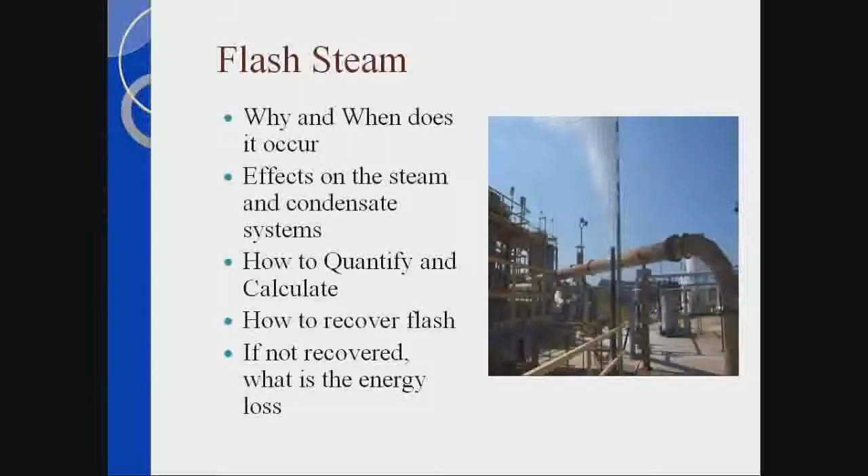Flash occurs - if you look at item 1, that's 100 psi steam coming into the process. 100 psi steam is going to be 338 degrees. It releases the latent energy, condenses down into condensate. Condensate's also going to be 338 degrees Fahrenheit. So down at point 2, the condensate going to the steam trap will be 338 degrees.

As condensate passes through the orifice of the steam trap, it will see a lower pressure. Let's say that is 0 psig - the condensate temperature has to come down to 212 degrees. How does it get its temperature of the liquid down to 212 degrees? It takes a percentage of the liquid and changes its state from liquid to vapor, or flash steam.

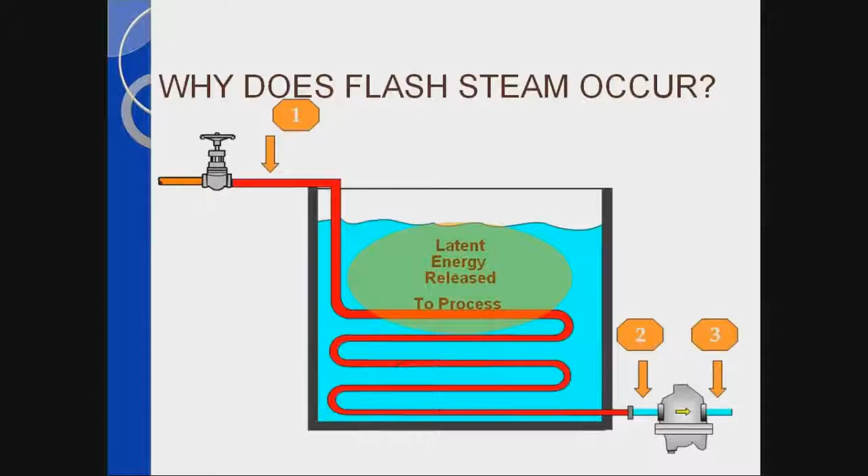For any given saturated steam or condensate pressure, there can only be specific values listed in the steam table - we call it the saturated steam tables. On release at each lower pressure condition, the heat energy that is released is called flash steam - that's the effect.

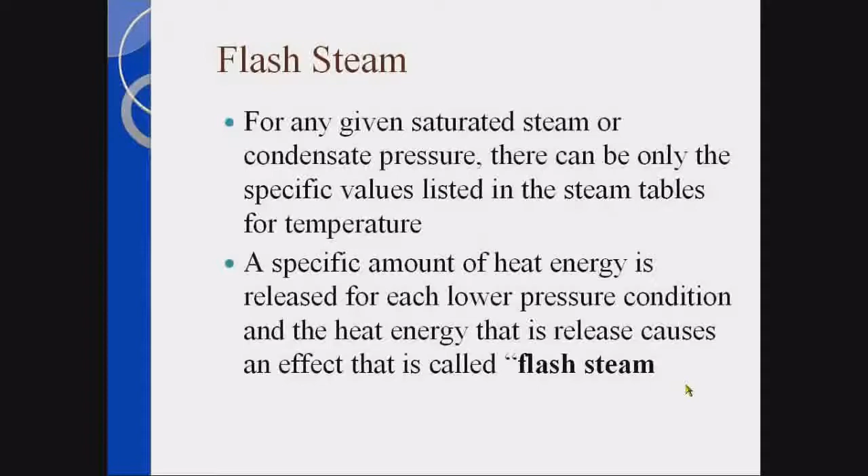Flash steam affects the condensate return line sizing, receiver tank vent sizing, steam system testing, steam trap discharge piping, energy loss. If loss increases, chemical costs increase, and if loss increases, makeup water increases. One of the things flash does is it causes water hammer if condensate return systems are not properly piped.

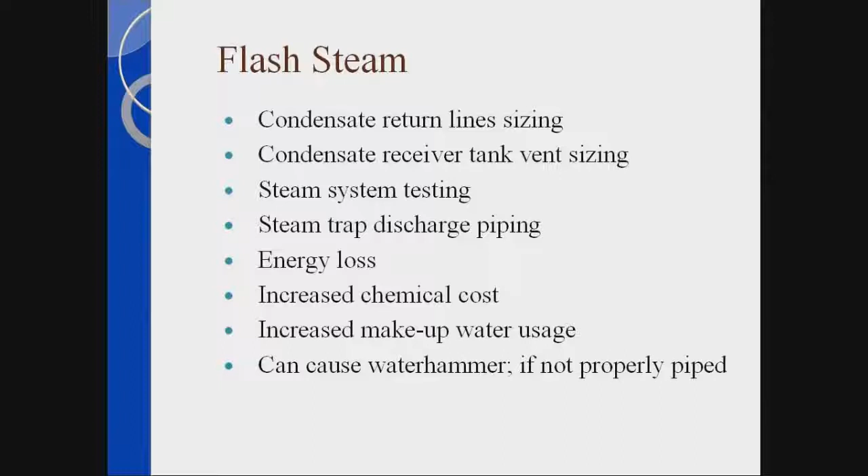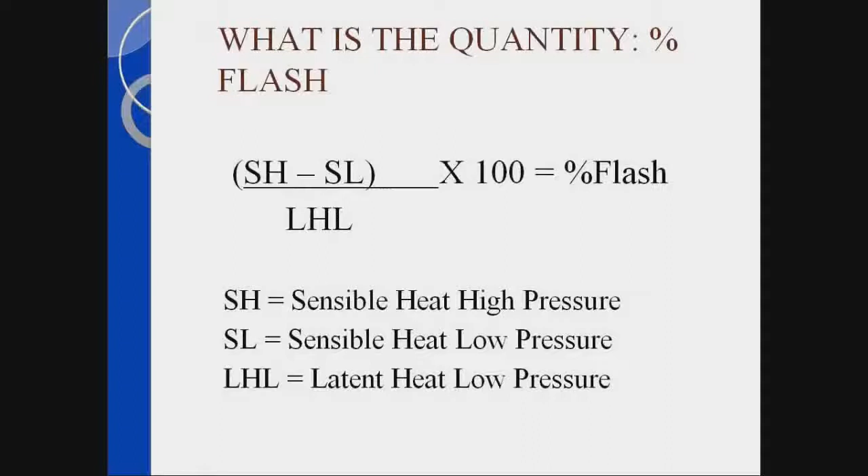How do we come up with the quantity of flash? The simple equation has been around for years: SH minus SL, divided by latent heat low, times 100, equals the percentage of flash. The question is, what is SH? That's the sensible heat at the high pressure. What's SL? Sensible heat at the low pressure. What's LHL? Latent heat low pressure.

Example would be a heat exchanger. We have a control valve supplying 100 psi to this heat exchanger. The process is absorbing the latent energy, condenses down into condensate, and the condensate in this piping to the steam trap is at 100 psi, or 338 degrees Fahrenheit. It discharges into the condensate return line, which is at 0 psi, so the temperature drops to 212 degrees.

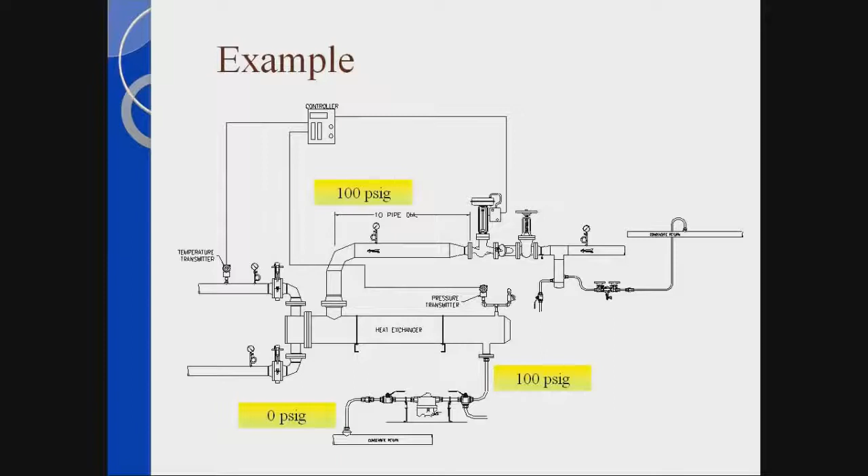If you go to the saturated steam tables and look up the sensible energy of the liquid high, you'll see it's 308 BTU per pound. The sensible low is 180.33 BTU per pound. The latent heat low, LHL, is 970 BTU per pound.

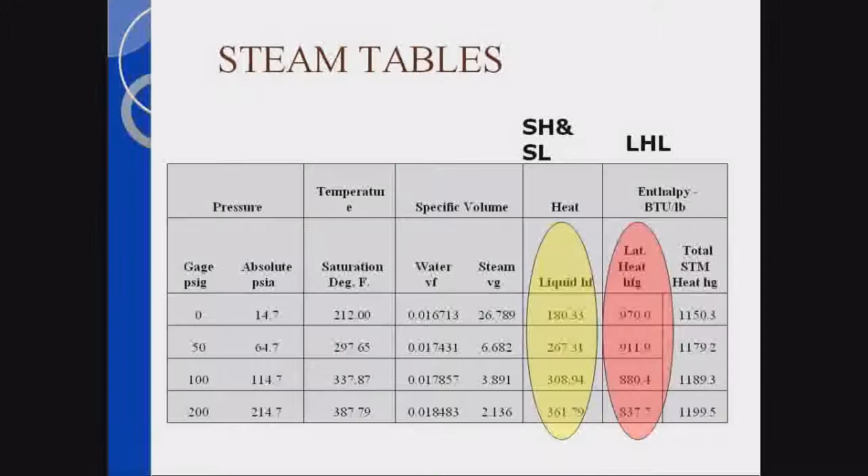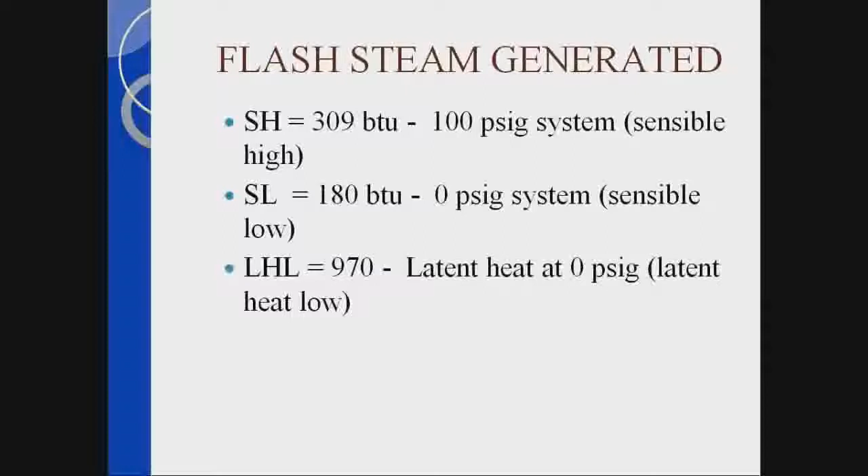If I put this into the equation, SH equals 309, which is the high side of the steam trap. The discharge side of the steam trap is 180 BTU per pound. The latent heat is 970, so I divide that into the equation: 309 minus 180, times 100, divided by 970, equals 13.3%.

What does that mean? If there's 1,000 pounds of condensate flowing through this heat exchanger, 13.3% of the liquid will change state, or 133 pounds of condensate, will form flash steam.

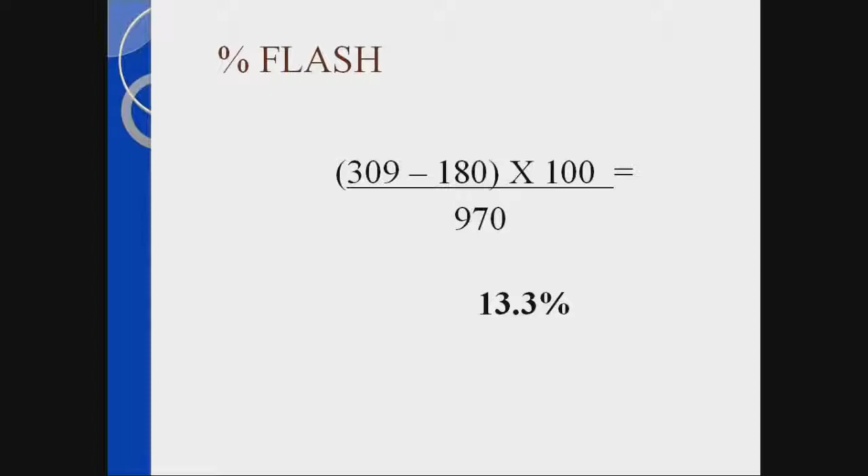The other thing to remember is, if condensate is passing into an atmospheric system, the flash steam is going to expand somewhere around 1,600 times. Therefore, we have to make sure we compensate the return system for the amount of flash that's going to occur.

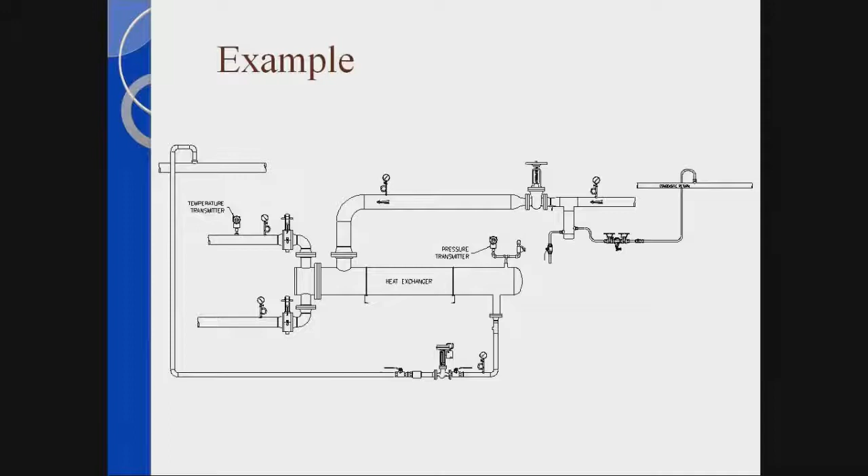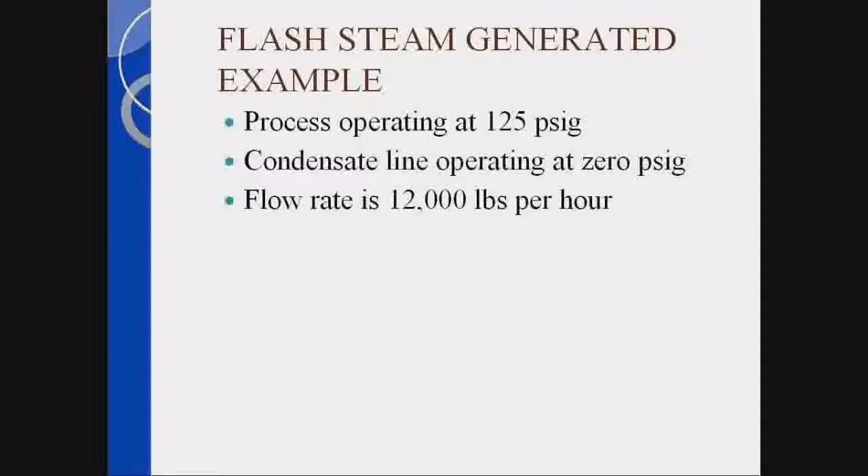Example: here is a process coming in. Steam comes into this process, goes through a control valve, and is raised up to the condensate return line. This example is operating at 125 psi. The condensate line is operating at 0 psi-G. The flow rate is 12,000 pounds per hour. Going through the calculations again: process consumption is 12,000 pounds, process steam pressure is 125 psi-G, the steam load is modulating, and the condensate return line pressure is 0.

Going to the saturated steam table, I find SH equals 324 BTU per pound, SL equals 180 BTU per pound, LHL equals 970 BTU per pound. The percentage of flash is 0.148. The amount of flash that's going to occur...

...is 1,776 pounds per hour. Now, if I do not recover that, and the cost of steam is $14.80 per 1,000 pounds, if this loss goes on 24/7 at 360 days a year, that loss is $227,000 if the flash steam is not recovered.

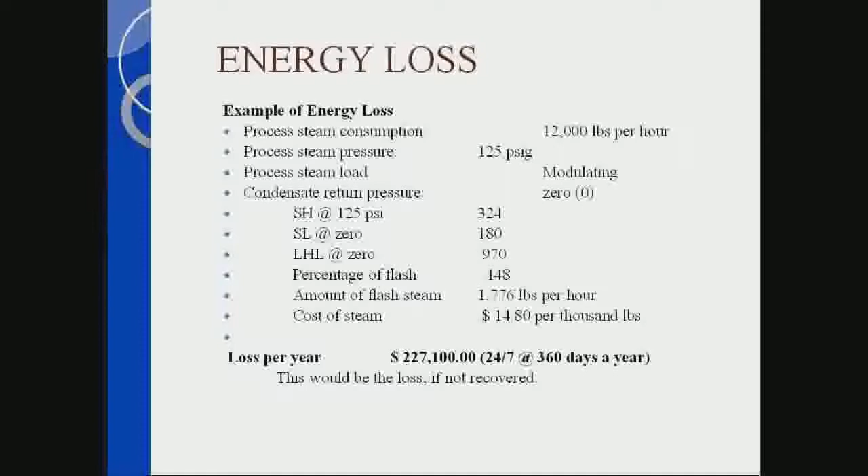Therefore, these dollar amounts become very high very fast if we are not proactive with recovering flash.

Example here: this is 2,800 pounds per hour. Let's say the cost of steam is $10, and it's operating 24 hours a day, 360 days a year. This loss right here is $241,920.

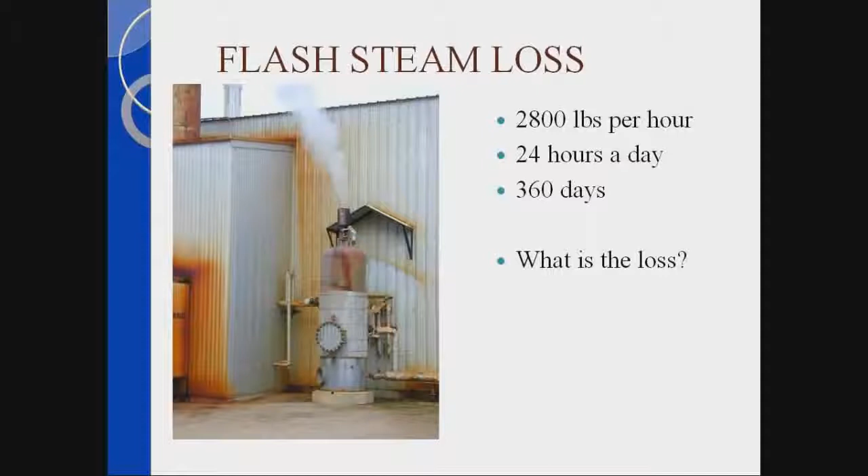Unfortunately, we go by facilities all the time, and this venting is quite normal, and the losses are pretty substantial. Or we have these—no matter where I travel, there's always somebody out there selling pails to collect the condensate that's dripping from leaks or flash steam, like this example. But one of the problems is it causes roof damage if we don't take care of the flash steam losses. In modulating process applications, we have to deal with flash.

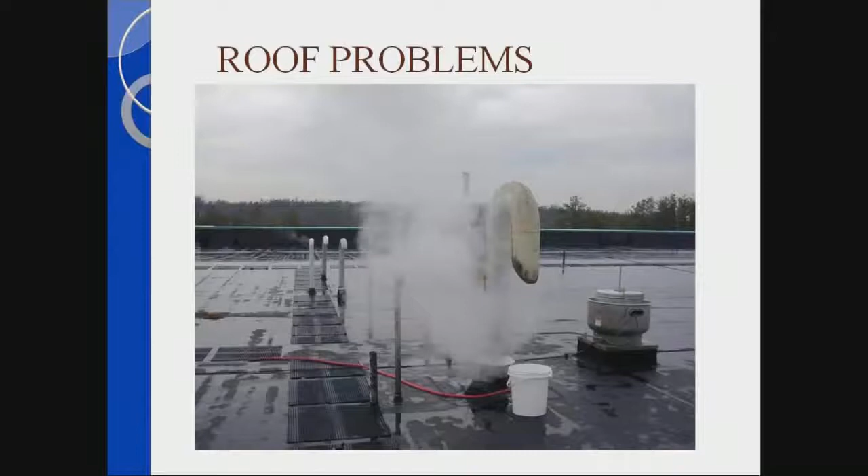So we'll talk a bit more about that. What are the other problems? Chemical issues, increased makeup water, damage to roof, ice problems, and safety.

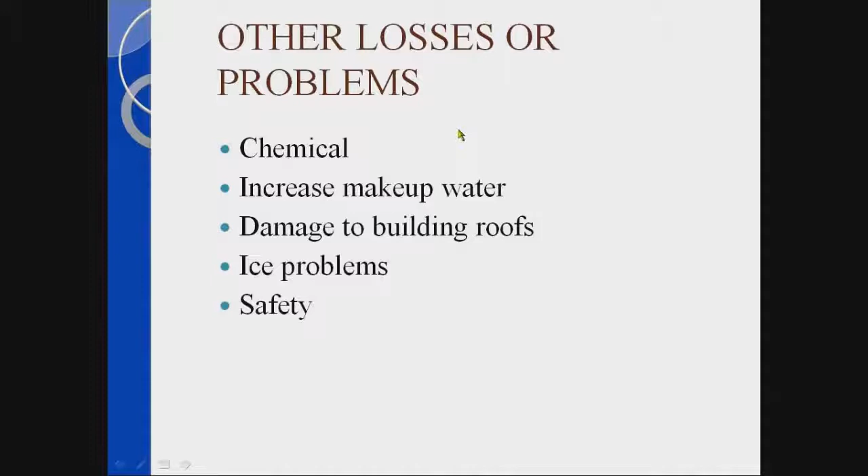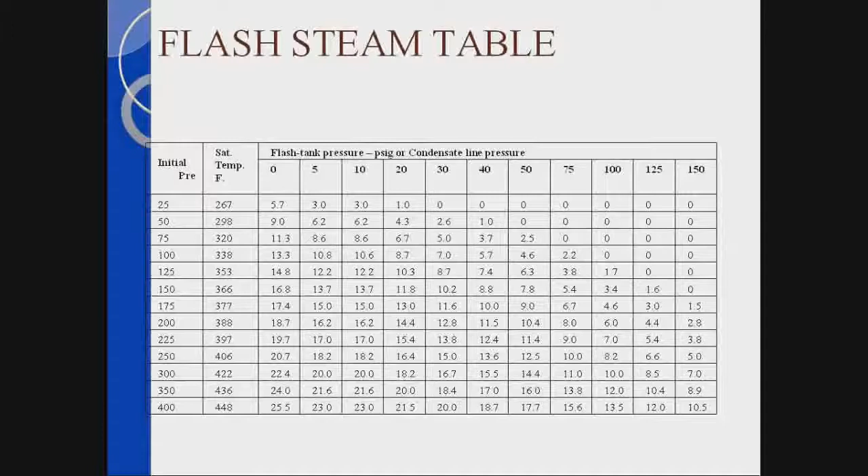We talked about how we've got to have flash. So how do we recover the flash? You say it costs me $200 and some thousand—great, how do I recover it? It's a great question. There are two types of systems in steam systems.

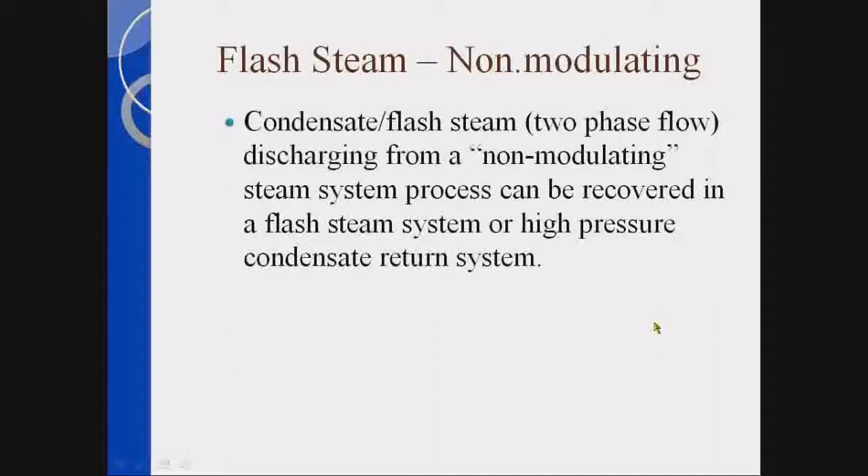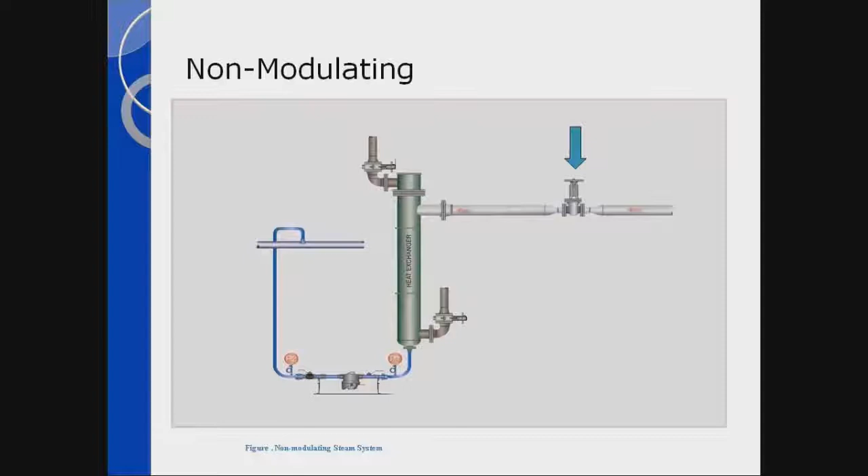That valve is not a control valve, that is an on-off valve. So when the process is operating, that valve is fully open, and the steam is not modulated to the process. In these cases, if you look at the bottom of the print where we show a steam trap, P1 and P2, we're always guaranteed a differential across the steam trap because the steam pressure is not modulating. Therefore, the condensate return line shown there can be at some elevated pressure, but it has to be lower than the supply pressure. The condensate can be sent back to the boiler plant under pressure.

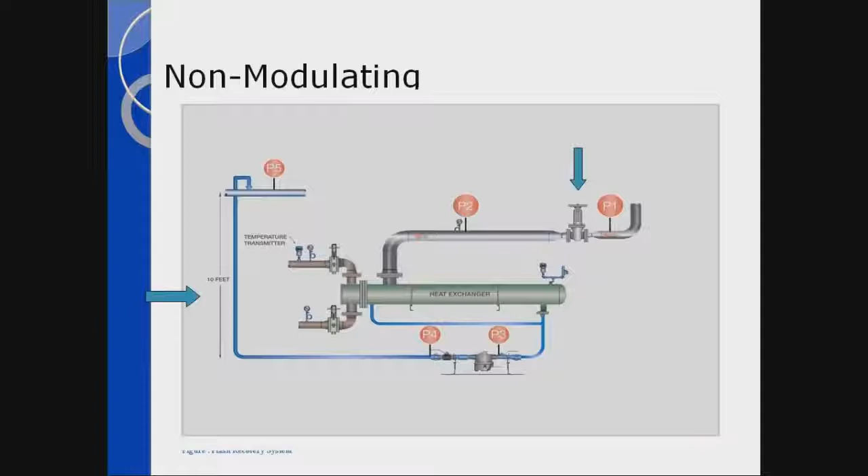Here's another example. If you look at the upper right-hand corner of this slide, you'll see another arrow pointed down. Again, this is an on-off valve, there's no modulation to the process. We have full line pressure going to the heat exchanger. Down at P3, P4, constant pressure differential across the drain device, be it a steam trap or control valve. With these devices we can elevate the condensate up in the air. On the left-hand side, we elevate 10 feet. Just a rule of thumb, every foot rise is half a psi, but I have plenty of differential to work with because we're not modulating the steam.

Flash steam from the condensate discharge can be directed into another low-pressure steam user. We call this cascading. With a high-pressure condensate return system, the percentage of flash is greatly reduced. The higher the pressure in the return system, the lower the amount of flash that will occur. Therefore, in plants where we go to high-pressure return systems, we reduce the amount of flash and elevate the sensible energy in the condensate.

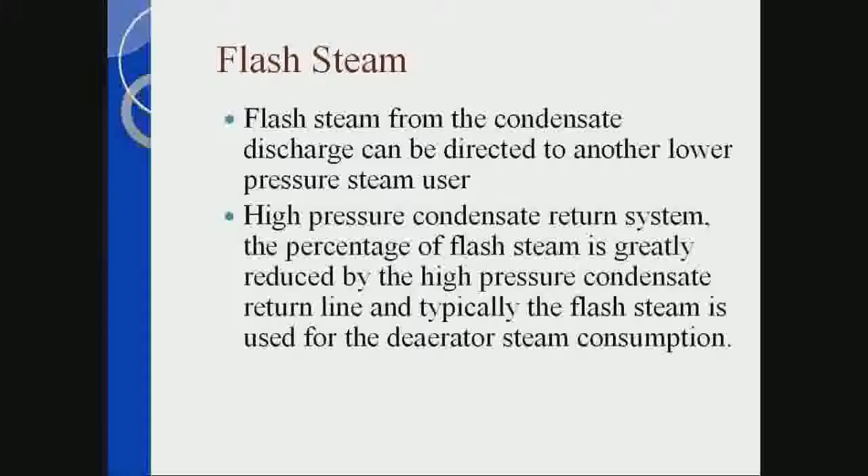With this type of operation, we typically do not go back to the deaerator, instead we go back to a high-pressure receiver and it's directed back into the boiler. Remember, if you do not allow the condensate to be exposed to the atmosphere, you do not have to go through the deaeration process.

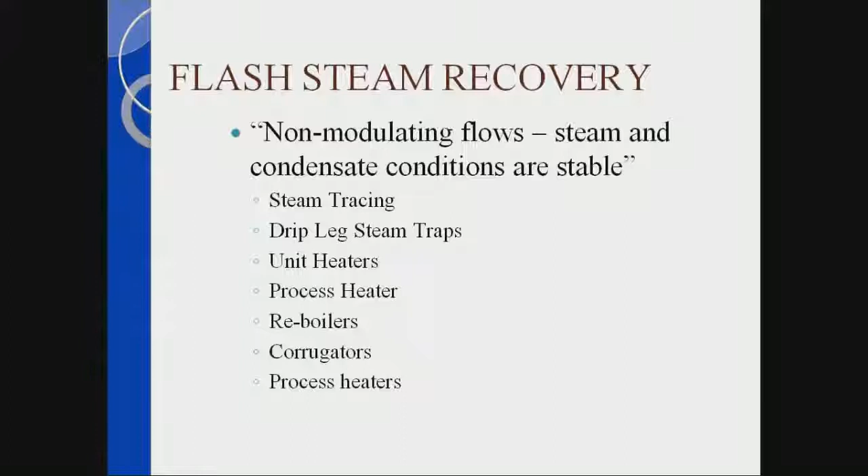Non-modulating flows, where can they be from? One great example is steam tracing systems—they do not modulate the steam to steam tracing. Drip leg steam traps, specifically like high pressure 200 psi, we take that condensate and direct it back into a high pressure receiver or to the storage side of the deaerator. Another example is process unit heaters, process heaters, reboilers, corrugators—all examples of steam flows that do not modulate, which we can direct back into a pressurized return system or a cascade system.

Directing these flows back into a cascade system or a thermocompressor system, we must basically separate the condensate from the flash. That's why we put in flash tanks. Flash tanks have to be properly sized and installed. The thing is, where do I take that flash steam? I can take it to a heat exchanger to heat water, air, or any other liquid, or direct it into processes with a lower pressure steam requirement.

The thing about the flash tank is the separation of condensate and flash. We also control the flashing process by the pressure in the flash tank. In the calculations for a flash tank, you need to allow enough space for the flash to occur, and there are certain calculations we go through to do that. We also need to reduce the velocity of flash steam to ensure no condensate carryover with the flash—we have to make sure the flash does not carry any condensate with it or reduce the steam quality to the process. This all comes into the calculation process.

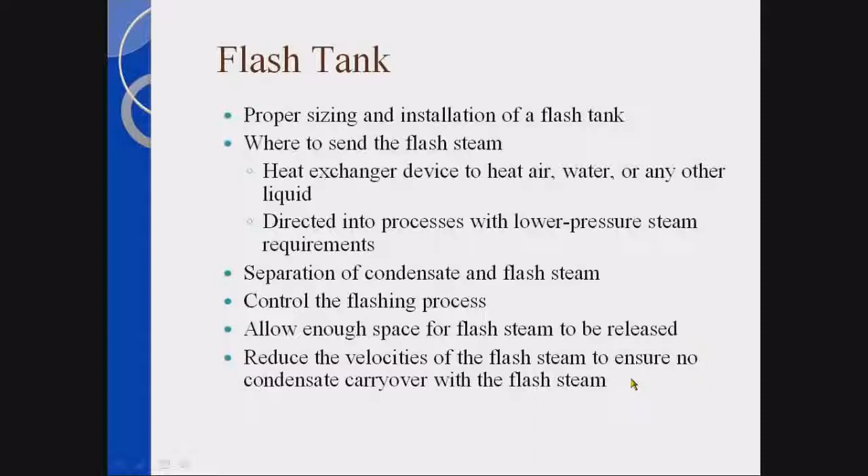Tanks can be mounted vertically or horizontally. The most important dimension in the design of a flash tank is the internal diameter—it needs to be large enough to ensure low discharge velocities of flash to minimize condensate carryover, and there's enough surface area to release the flash from the condensate. One thing that comes up quite a bit: if the condensate line is properly sized, then we'll get separation of the flash from the condensate in the condensate return system.

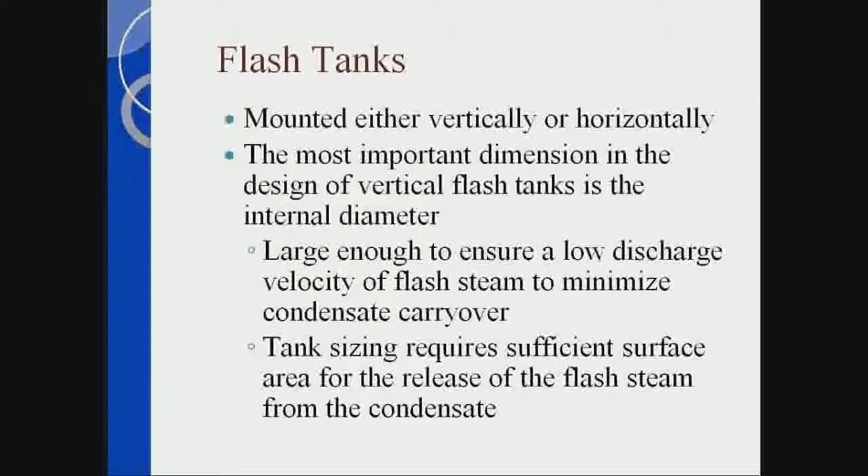Unfortunately, most condensate lines are undersized instead of being properly sized or oversized. So therefore, we have to rely on the flash tank to do the separation of the flash from the condensate inside the tank. The other thing that needs to be looked at is the outlet velocities of the flash tank—make sure we're not exceeding 3,000 feet per minute, which means we are dropping out the condensate from the flash. Again, a high percentage of industrial condensate operations are not properly sized. Therefore, the flash tank has to provide the proper area for the condensate to release the flash steam.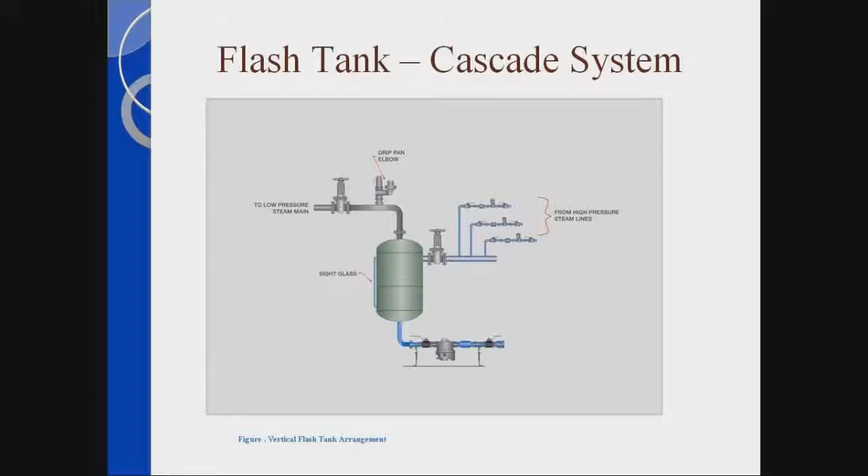Here's a picture showing a flash tank. As you can see, it's a smaller tank with a steam trap piped off the side of it. The flash is exiting the top part of the tank.

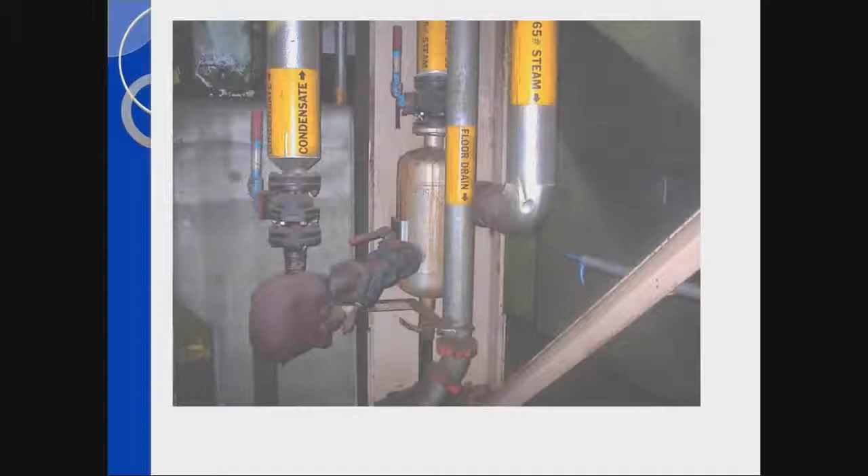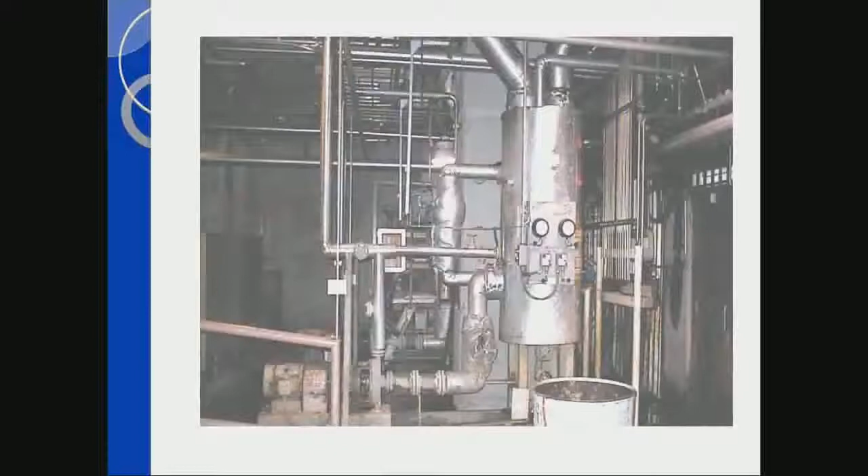The other thing - a question always comes up in comments from plants: we don't have use for low pressure steam. What can we do? The thing with low pressure systems is that we can thermal compress the steam. Therefore, we can take the low pressure steam and thermal compress it to a higher usable steam pressure.

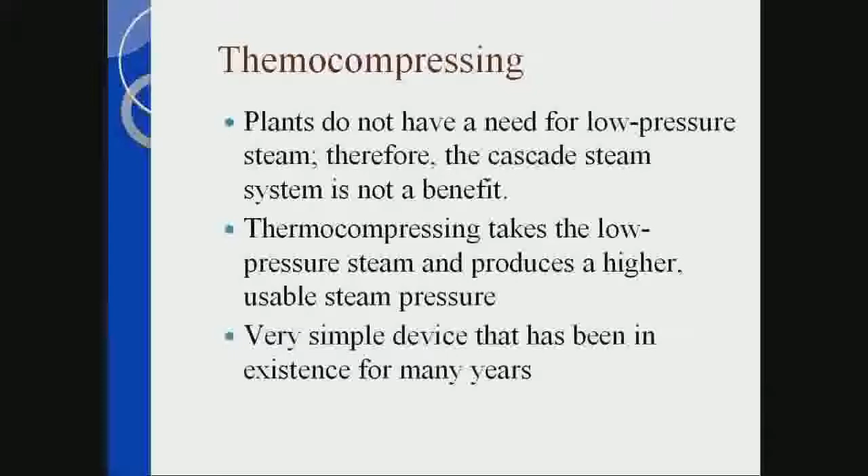A lot of times I hear a comment, is this new? It's been in existence for 60, 70 years. Certain industries have used it for many, many years. Other industries have not used it.

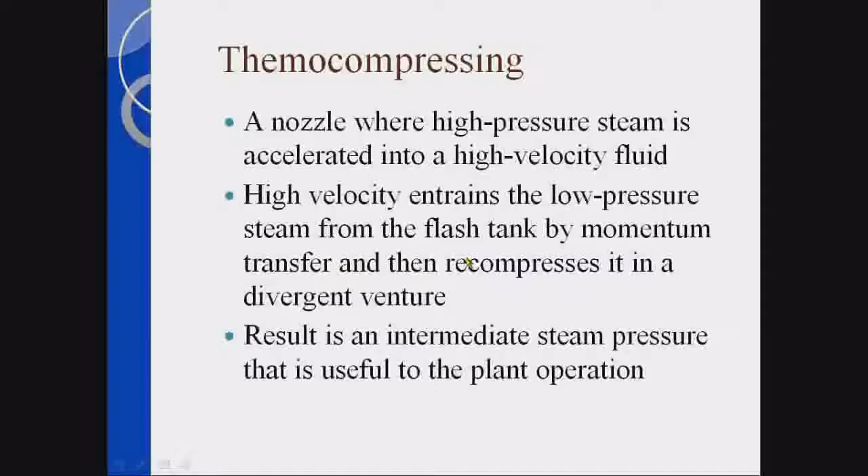The thermal compressor is basically a nozzle where high pressure steam is accelerated into a high velocity fluid. That high velocity entrains the low pressure steam from the flash tank by momentum transfer, and then recompresses it into a divergent venturi. The result is an intermediate pressure that's useful to the plant operation.

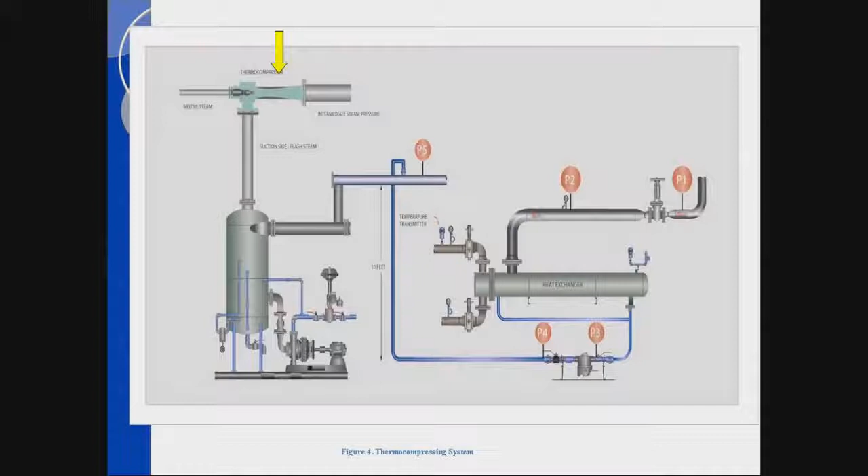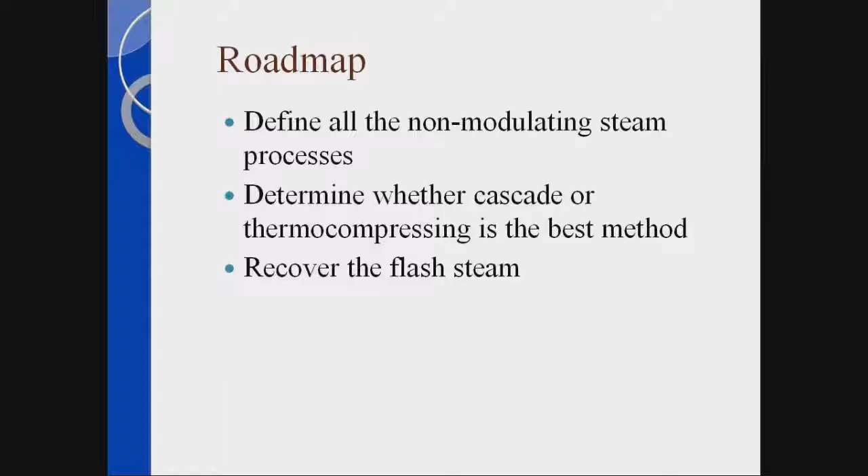It's a great way to make a usable flash when I don't have the ability to use low pressure steam. The roadmap we want to follow when doing this is: define all non-modulating steam processes, determine whether we can cascade it or thermal compress it, or take the steam to a condenser type system, but recover the flash steam. Remember, if I'm venting the steam to atmosphere, that could be $200, $300, could be $700,000 a year. Can't do that today.

The other steam process I was talking about is modulating flows. Steam and condensate conditions will change and are not at a steady state. The modulating system has a modulating steam control valve to the process because the intent is to maintain temperature of the process. Condensate discharge from the process must discharge into a vented condensate receiver.

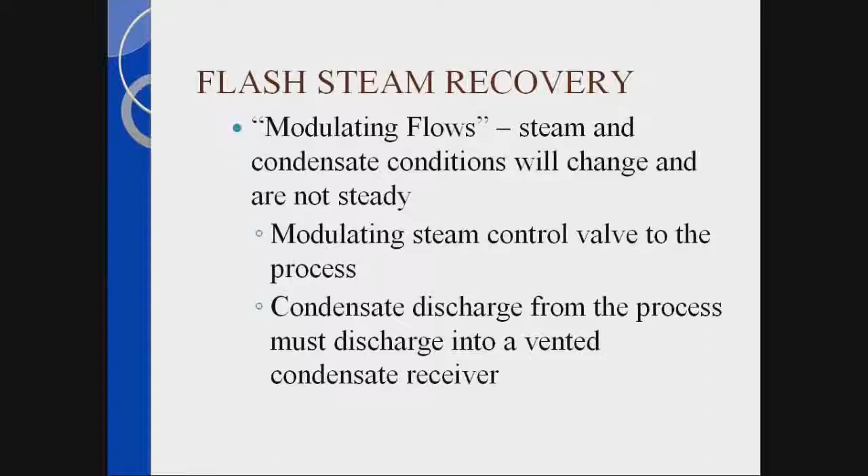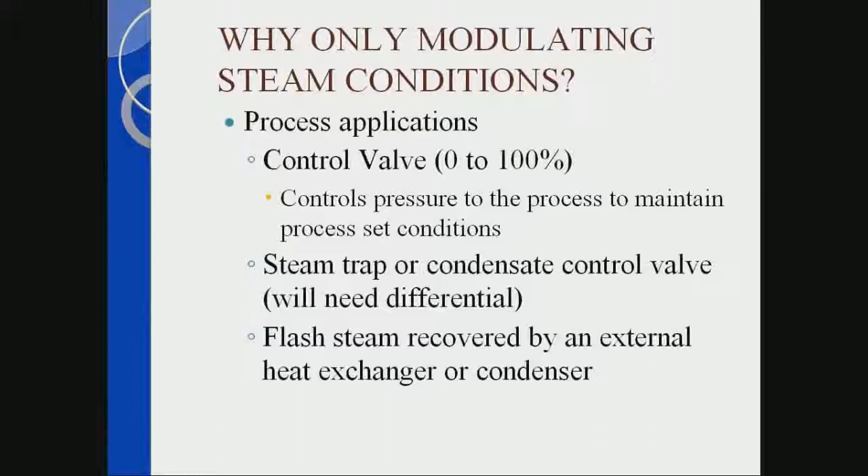In process applications, the control valve is going to travel from anywhere from 0 to 100%. Really it's controlling pressure of the steam to the process to maintain the process set conditions. The steam trap or condensate control drain device does need differential. So as I come down to low pressures, I cannot afford to have back pressure onto those drain devices. The problem with this is flash steam recovery has to be done by an external heat exchanger, or what we call a condenser.

An example is on here. This is a modulating load, showing P1 and P2. The yellow arrow is showing the control valve, which can modulate anywhere from 0 to 100%. If it modulates down to, say, 5%, then P3's pressure is going to change. If it opens to 50%, P3, which is the inlet to the steam trap down at the lower part of this slide, will change. The thing to remember is that coming out of the steam trap, or P4, going to the condensate header, which is P5...

P5 must be 0 PSI. To make this process work, P5 has to be 0 PSI. One of the problems we find in process applications is their pressure at P5, which puts pressure at P4, and we lose differential when the valve modulates down, which will back up condensate and cause water hammer. So remember, when you're putting a system in, P5 must equal 0 psi.

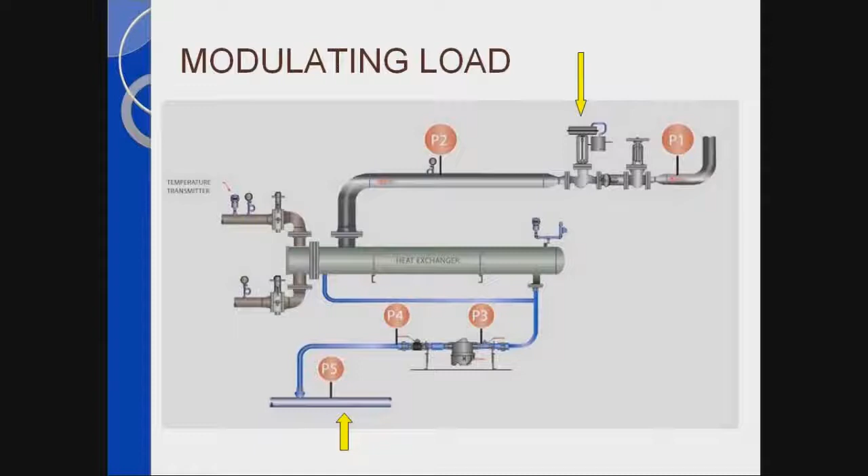Therefore, we bring the condensate into a tank, and these tanks have different names depending on the industry. One industry calls them condensate tanks, another calls them condensate hogs, another calls them flash tanks. They really are the same thing - flash tank, condensate tank.

We're doing the same thing as with non-modulating loads, allowing the condensate to be separated and the flash to be vented. No different than the flash tank we talked about. The outlet velocities have to be very low to make sure we get no carryover condensate going out the vent, and we have to make sure we have separation. We want condensate to drop to the bottom of the tank and be recovered or pumped back to the boiler plant.

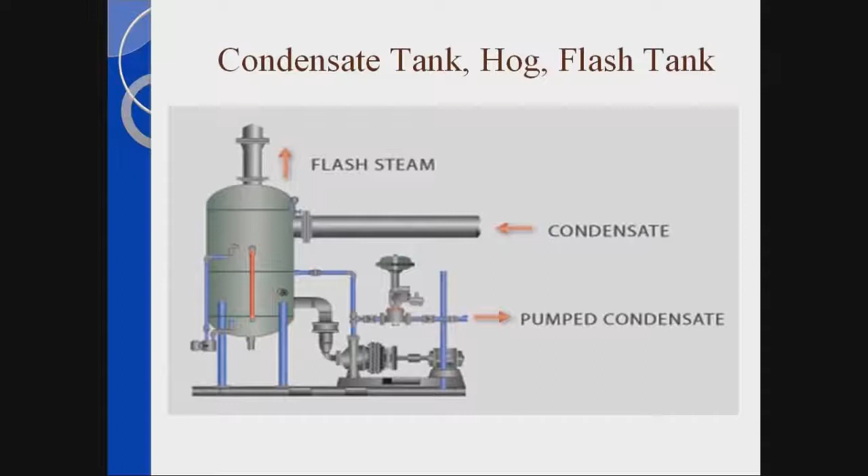To recover this becomes a little more difficult, because this tank pressure, as shown in this diagram, has to be 0 psi. So if it's 0 psi, I cannot cascade it, and it's very difficult to thermocompress it. Therefore, to deal with it, I go into a condenser.

The condenser takes process fluids into basically a shell and tube heat exchanger, designed specifically for a condenser application. The flash steam flows up into the condenser, the latent energy is absorbed by the process, condensate is formed, and the condensate drains right back into the tank. The end result we're after is that the flash steam is not vented to atmosphere. At the top of this configuration, we would want to see no steam being vented to atmosphere.

Now, condensate can be pumped, as shown here, through variable speed drive pumps or control valve pump applications like this, maintaining level into the tank. But remember, the same philosophy in condensate tanks as we apply in flash tanks uses the same calculations - we want separation, we want the flash to be separated and vented at very low velocities.

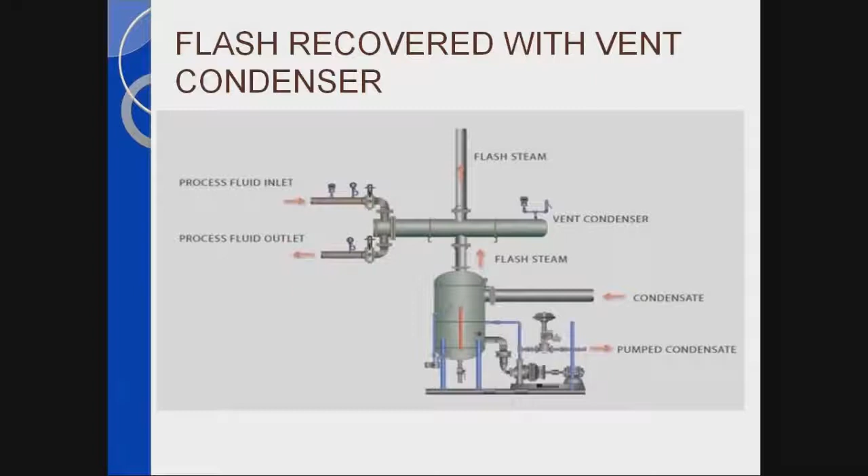The other thing we apply, specifically in areas with heating needs, the northern climates where we're heating quite a bit, is to put in an air heater, as shown here. We allow the flash to come into this air heater, and we absorb the flash steam by heating up the air. With these units, we've also done process air heaters, where we've taken properly sized coils to condense down the flash and preheat the air for the process.

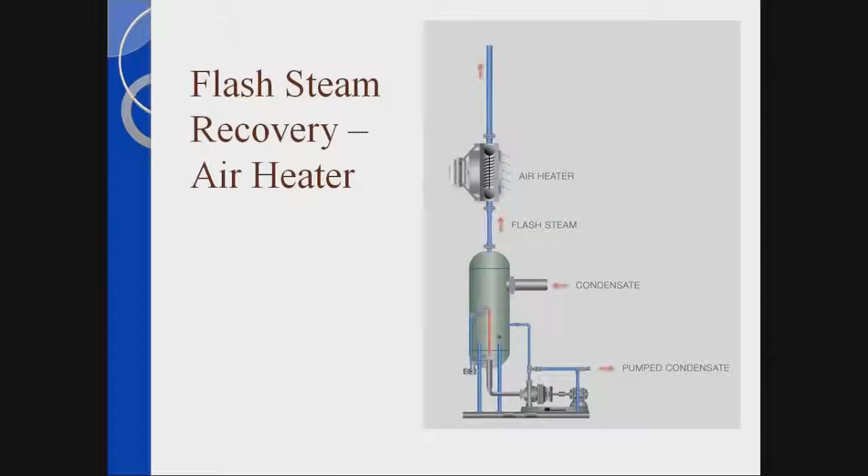I'll give you an example. I was at a facility last week, in a cool area, down in a production area, and the vent for the condensate tank system was right there. By just putting in a simple air heater, as shown in this print, we can collect that flash, or recover that flash energy, and provide heat for the building, which they said is needed for about 185 days a year - a lot better than heating the outside air, which is no use to anyone. So this is just another way of accomplishing recovery of the flash steam.

Very simple method. Kelly, without interrupting you too much here, how much steam is vented? How much flash is vented to atmosphere? Just a guess - if you walked into your average plant, would you expect to find it or not?

Are they in North America? In North America?

Probably more than 80% of the plants are venting steam. Wow, really? That's quite high. Yes. All right, I'll let you continue.

If you go to other parts of the world, it depends on the country and so on, that percentage drops dramatically.

But anyway, when you come into facilities, the discussion I was having this morning is I need a heat sink - what is a heat sink? Something I can take the energy of that flash going to atmosphere and absorb it. One option is domestic water, for showers or things like that, depending on the campus setting. You can use it for heating up water.

Process waters - I'll give you one example. In the paper industry, we heat up white water. Great heat sink, you need to heat tons of water up, so it becomes very viable to do it that way.

Process fluids - any fluid I have to heat up to some temperature, say 190 degrees, is great. Thermal compressing - in some applications it gets very difficult to thermocompress a very low pressure steam, say half a PSI. We have some applications where we've been able to do that, very, very seldom, but it's there.

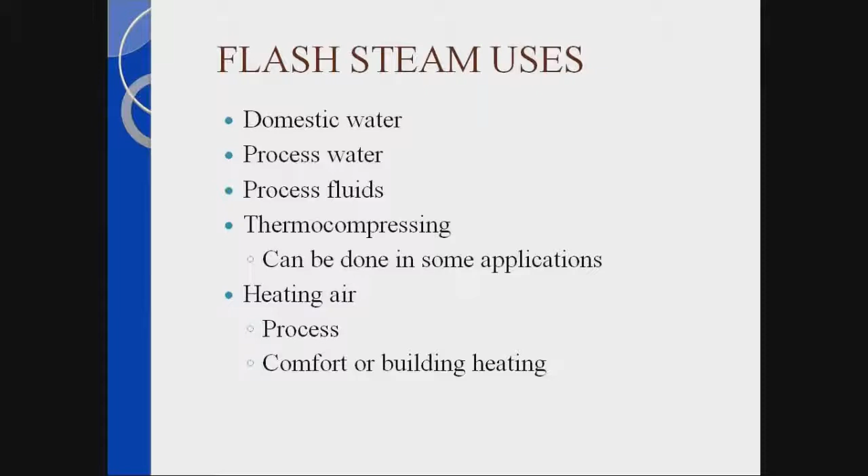The other thing is heating up air. A lot of times we think condensers, we've got to heat up a liquid, but think about heating air for a process, or even for building heating and comfort. Usually the condensers or condensate tanks are sitting in areas where people are, in the production areas where we can heat up air. So it's quite viable.

Kelly, can I interrupt you again? We have a question. Sure. Somebody was asking, Gary actually, other Gary, not me: is there a flash tank or other heat collection device that you can attach to the vent line that is set for oxygen removal?

I didn't catch it, you want to repeat that? They want to know if you can get a flash tank or a collection device that also removes, on the DA, he's saying. Oh yeah, great question. I didn't even understand the question at first, but yeah, I understand his question now. Thank you for bringing that up.

The only place that we say it's acceptable for steam to be vented to the atmosphere is off the deaerator. And for the deaerator, you have to vent 1/10 -- if you don't know the volume, you vent 1/10 of 1% of the volume of the deaerator to atmosphere to make sure you're getting rid of non-condensable gases out of the deaeration process.

Years ago, I go back a few years, maybe too many years, but there are designs of old deaerators that I walk into that already have the condenser in there. Somewhere along the line we just forgot to do that. But it's a great application because we come off of there and put in a condenser. The heat sink is the makeup water going into the deaerator, so we pick up that BTUs and go into the deaerator. Even today, we don't even allow the vent off the deaerator to happen. But remember, with the condenser, it has to be properly sized so I don't create vacuum and keep the non-condensables inside the deaerator. I want to make sure that I am venting the non-condensable gases out of the deaerator.

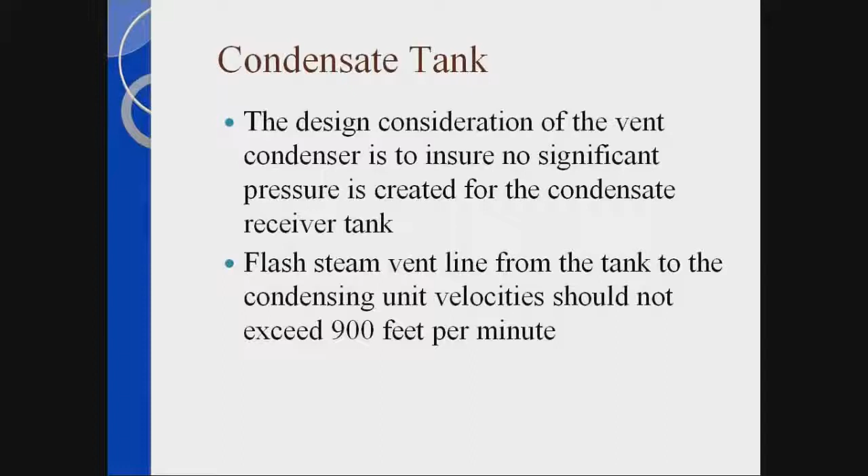The flash steam vent line from the tank to the condensing unit velocity should not exceed 900 feet per minute. The reason we're very specific on that is the flash steam is traveling in an upward flow, and we're condensing the condensate, and the condensate is going to be dropping down through that vapor flow -- we want it to drop. We don't want any velocity to keep the condensate going up into the condenser. It's a very important fact, and a lot of times people forget about that.

The success of the installation is information -- the more information you have, the more successful you are. One of the things is that I understand the maximum flow rates; everyone needs the maximum, and that's great, we need that. But the other thing is minimum flow rates. Unfortunately, most of the time we'll not get the maximum flow rate, but 100% of the time we get to the minimum flow rate. And if we don't take that into our calculations, it can create problems.

Same thing with cooling flow rates: what's my max? I have to design the unit for the max, but as critical as max, I need to know the minimum -- the minimum flow rate I'm probably going to hit. The thing about it is that if I don't have enough cooling to be condensing down the flash steam, the last thing I want to do is pick up so much BTUs in the cooling fluid that I change state from liquid to vapor on the cooling side and create severe water hammer -- basically taking a condenser and creating a boiler out of it.

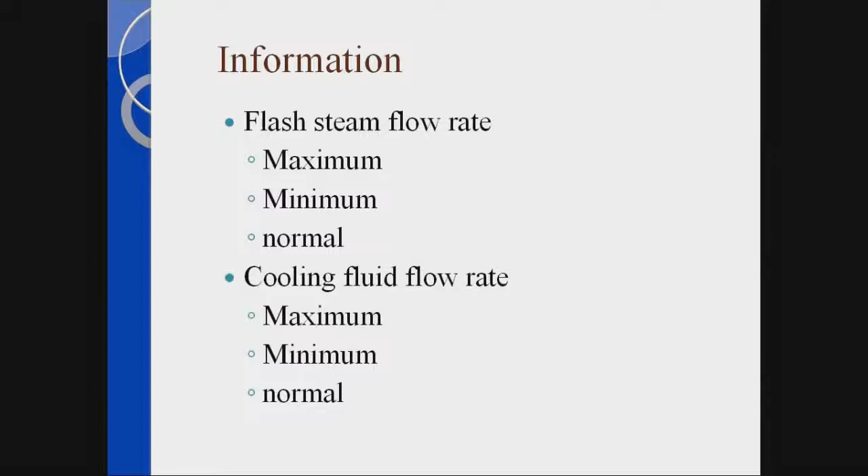In applications where our flow rates for the heat sink or cooling could be questionable, we have to put in bypasses around the condenser to make sure we do not create issues with the condenser. It's just part of the things we have to look out for when we design the system.

The other thing is, I talked about effects, and I can go into all the effects onto the system that flash does cause us issues.

One of the biggest issues we see week after week at facilities is condensate lines are not properly sized. That's a big, big factor. Remember, condensate lines are two-phase flow. Size them for liquid and flash steam.

Here's your roadmap: determine modulating versus non-modulating, as I said before, and set a roadmap for recovering flash. Tell people it took years to get where you're at, and it's going to take a couple of years to get back.

For allocations, one of the things I was in a discussion about this morning, the plant said, I need a 2-year payback. But recovering flash usually has less than a 6-month payback. It's one of those items that has a great payback.